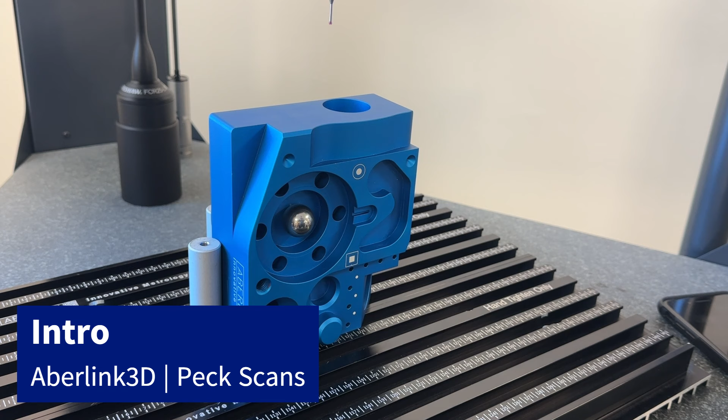Everyone, in this video we're going to be covering Peck scans with the TP20 touch trigger probe.

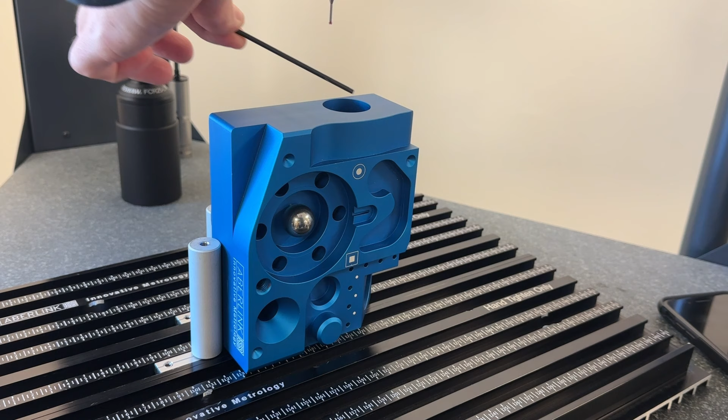I've already set up a basic reference system on this large test block, which is the plane, the large circle on the top, and a line along the back edge. I've also done the best fit to CAD already. There are 4 exercises we're going to cover: a simple curve measurement on this radius comparing the profile to CAD, a straight line curve measurement on this wave profile at the top, measuring an entire surface, and finally a Peck curve scan closed along this entire pocket compared to DXF.

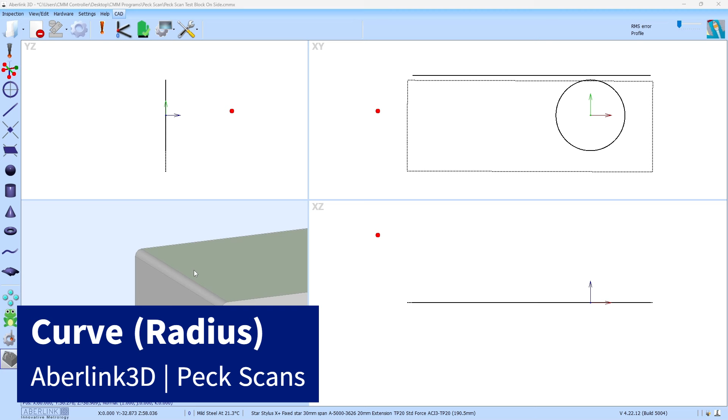So let's dive in. In the first example we're going to be measuring a curve profile along this face, this radius and this face, and checking this as a profile. To do this, we start off by selecting a curve measurement, which is for profile of a line, so it moves in a single line.

The first thing we need to do when measuring curves is make sure they're projected correctly. So we don't have any planes measured in the XZ plane or in the XZ view. Before we take any measurement points, we're going to define the plane and select the XZ machine plane, meaning it'll square up with this XZ machine plane.

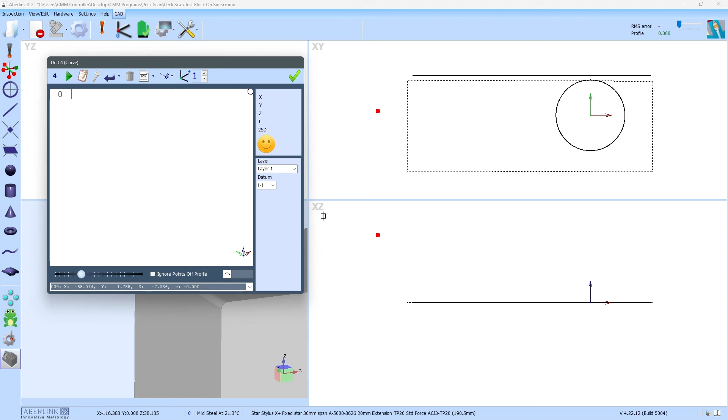We now want to take 3 contact points: the first point, which is the start, the second point, which is the direction, and then the third point, which is the end.

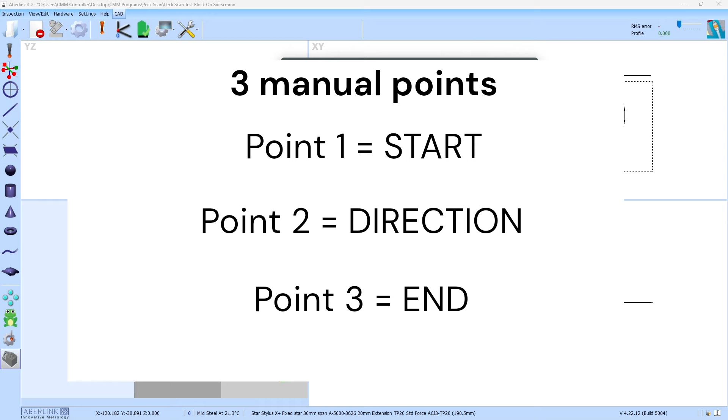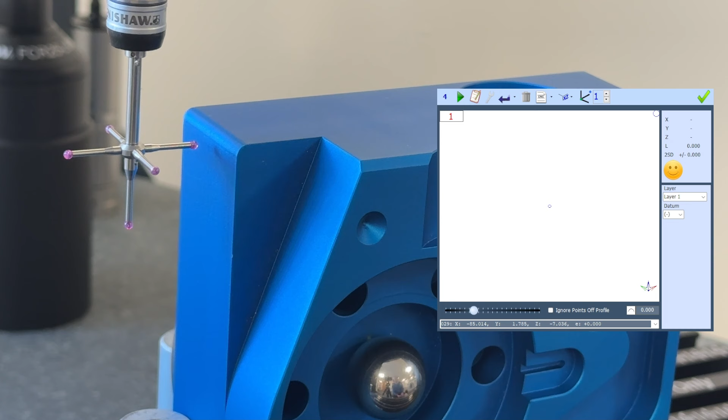If I switch the camera on now, you'll be able to see this in action. I'm going to take a start point roughly here, and then I like to try and take the direction and end points quite close together so that it doesn't go wandering off too much, as if the direction and end aren't aligned very well, it can go wandering off on the part. So I'll take the direction point here, drop down a little bit further, and then take the end point. You'll see in the feature window there we have 3 points.

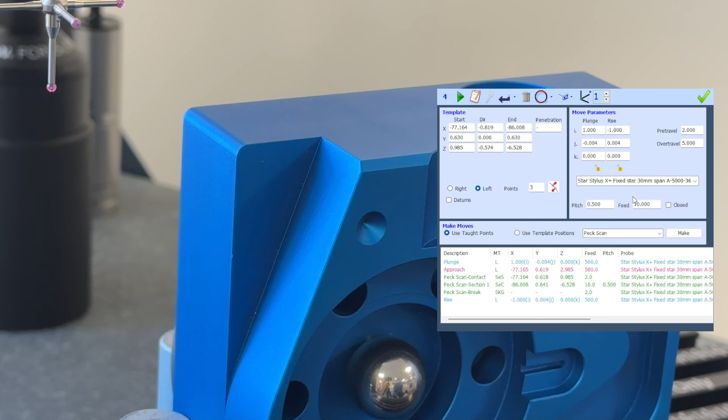All we need to do now is go to CNC, change from machine touch. In the drop down box of the make moves section, click the drop down box and select Peck scan, and then after that all we need to define is the pitch. The pitch is the steps in which it takes between contact points. I'll try a 0.5 pitch, hit make, and then we can watch this cycle through by pressing play. It goes to the start point, heads in the direction of the second point with steps of 0.5 millimeters, because I set the pitch to 0.5.

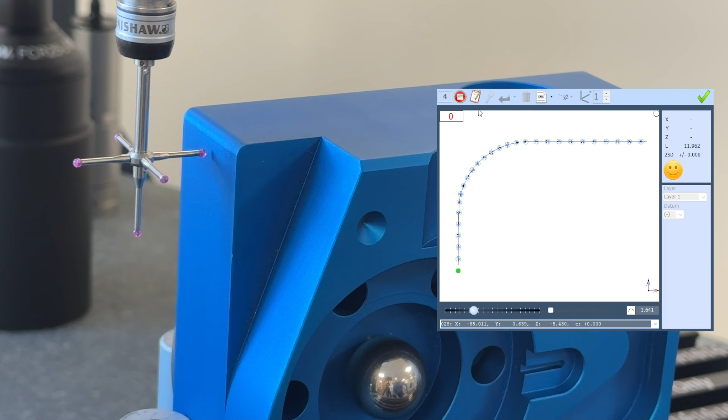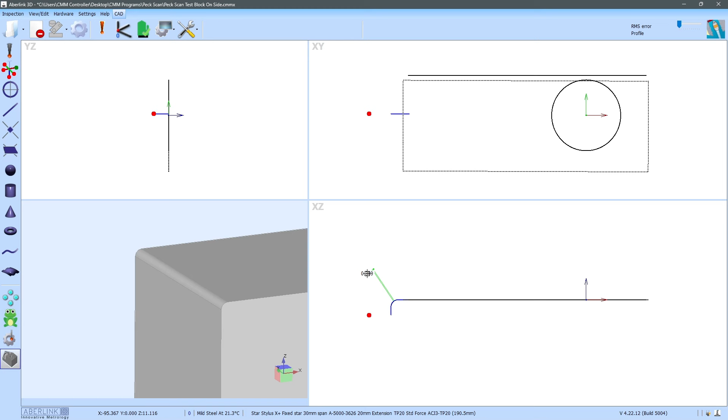It gets feedback on every single point, which is why it's able to work its way around freeform surfaces, like so. It will keep pecking at that 0.5 millimeter pitch until it gets to the end, and that's it complete. So what we'll have now in the software, because I've already linked it to CAD, is the color coded heat map points of the contact points of the measurement. We can see there, and we can also then dimension that entire curve as a profile of a line.

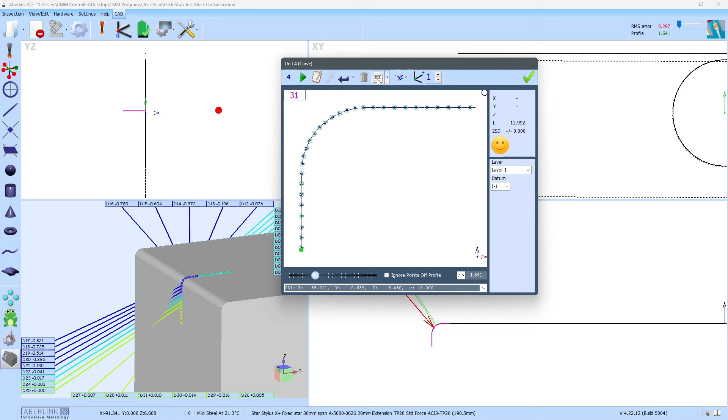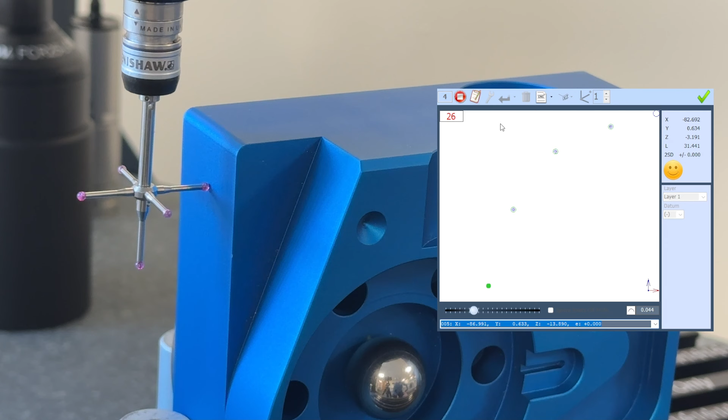Now just to highlight the issues with adjusting the pitch, because you will have to mess around with the pitch depending on the size and variation of your surface. But if you do set the pitch too high, in this example, if I set the pitch to 5 millimeters and press make, if we watch that through, you'll see the steps become way too big and it ends up completely missing the surface. We've completely missed the radius there, and we've only gathered 5 points, which is not what we want. So it's getting a happy medium between cycle time and data, and you do that by adjusting the pitch.

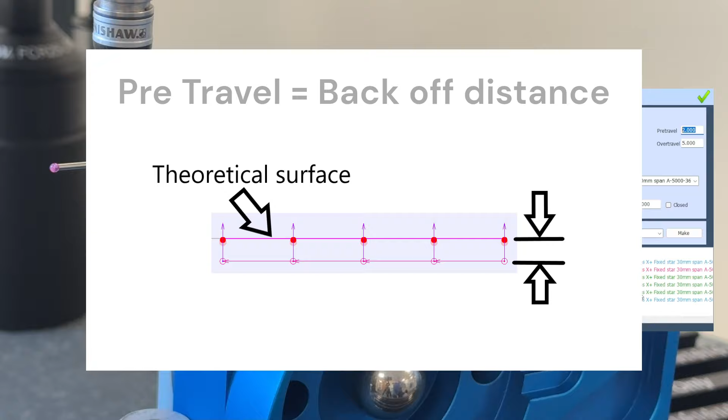The only other thing you may need to adjust is the pre-travel. This is the distance it backs off between points. So for more aggressive surfaces, i.e. more aggressive curves, you may need to adjust the pre-travel to avoid any crashes. You might increase this to say 3 or 4, potentially 5 millimeters. But yes, that is the single curve measurement.

Just to cover a final example with a single line curve, we're going to measure this freeform surface here, and again we're just following the exact same principles. So if I switch to the correct start now, we'll open up the curve.

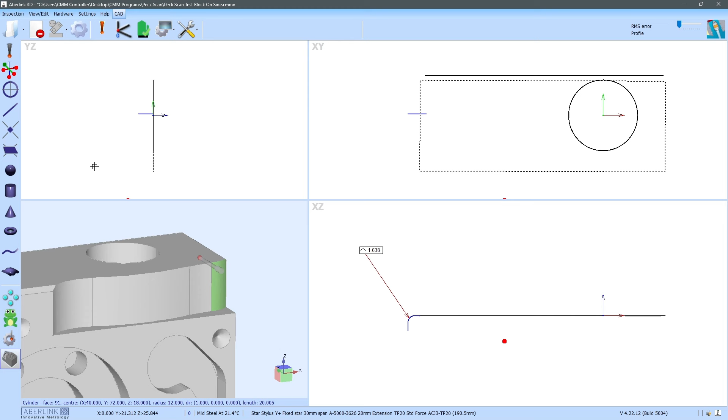Now we do have a measured plane that we could project these data points into, or we can use the XY plane. Doesn't really matter. I'll choose measured in this example just to change it up and select this plane. So the data points will be projected into that plane. Again, it's a 2D single line curve. We are going to cover the surface in a bit.

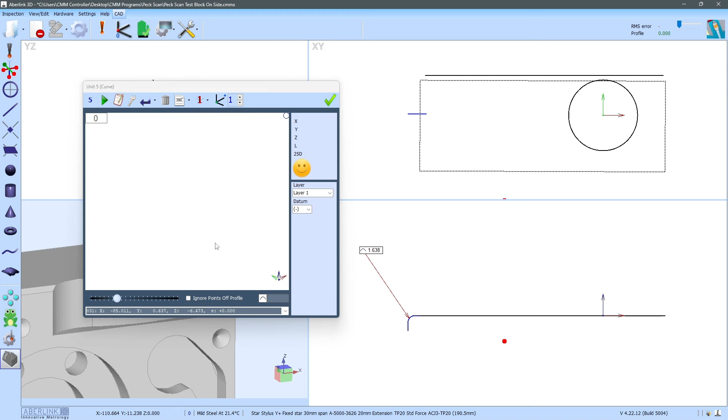Now we just need to measure the 3 contact points, so the start, the direction and the end. So if I now go to the part, I'll take a contact point here to start, then I'll drive over, trying to keep the second direction and third end points close together. So this will be the direction and then this will be the end. There we go, so we have the 3 contact points.

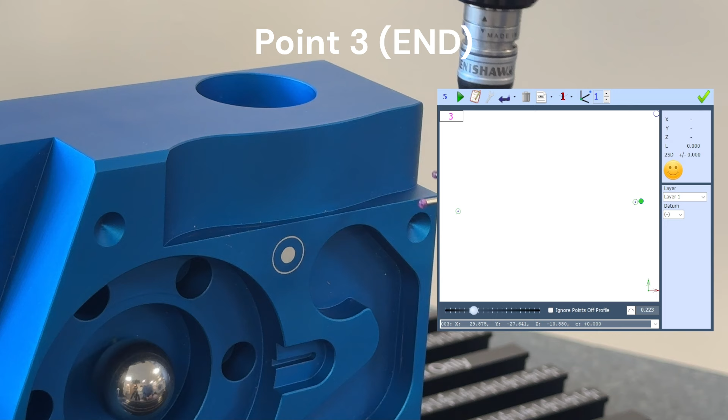Just move the probe away, and again we're going to go to CNC, change from manual touch to Peck scan, set the pitch. 1 might be okay here, so I'll try 1. We'll hit make and then press play.

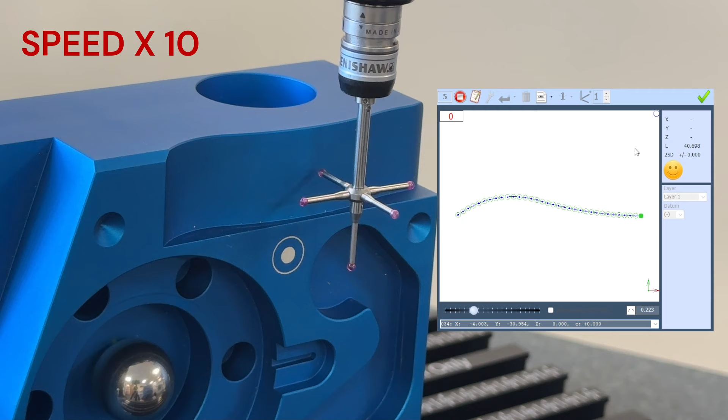And there we go. So started at the first point, headed in the direction of the second point, and ended at the third point, with pecks in between of roughly 1 millimeter.

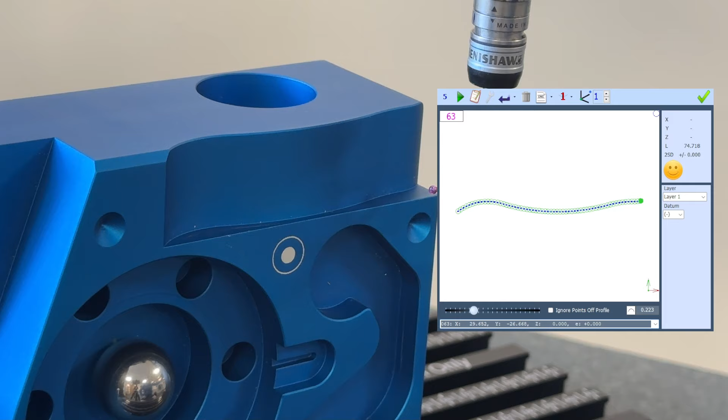So if we keep that open and just switch to software now, you'll see those data points have been overlaid on the CAD model. So we can see those as a color coded heat map. I'll just change the style here and adjust the tolerance. We can even adjust the magnification of the points.

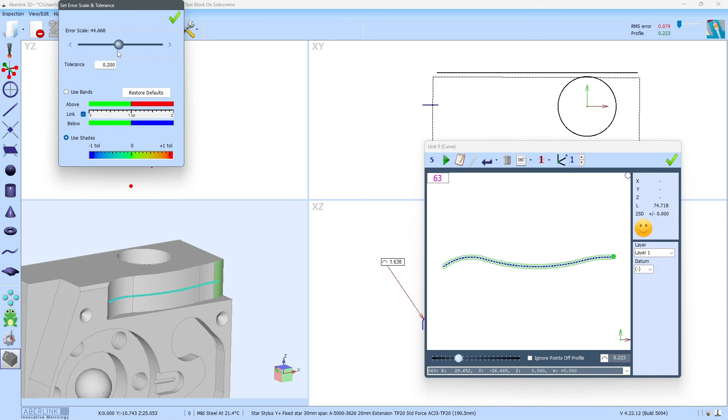In relation to the CAD model, and as before we can dimension this curve as a profile that can show up in the tabulated report. So that is a slightly more advanced curve measurement on the wave profile of the large test block.

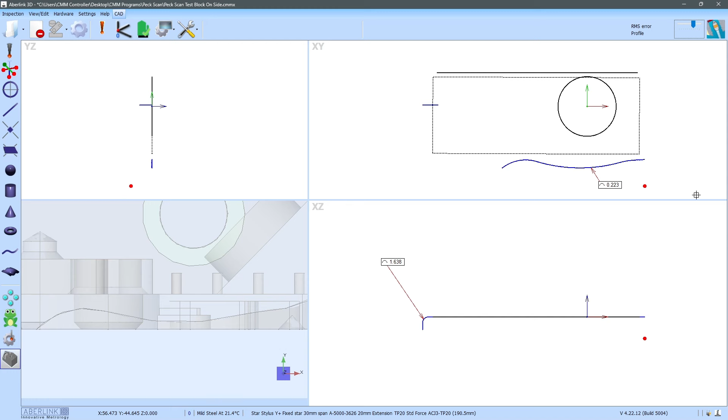So we're now going to look at measuring the same wave profile, only rather than doing a single line curve measurement, we are going to measure a surface, mapping out the entire surface of the wave profile rather than a single slice when we use the curve.

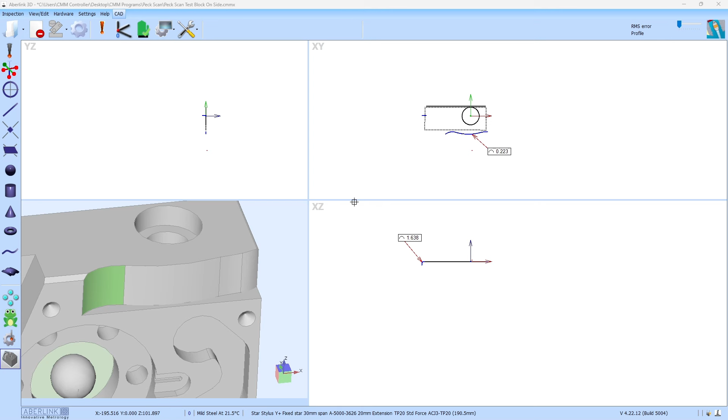So we now use surface measure, so open up a surface feature, and the key thing here, we don't need to define a plane like we did for the curve, as this is a Freeform 3D feature, and the 3 points that we typically would take with the curve measurement now define an L.

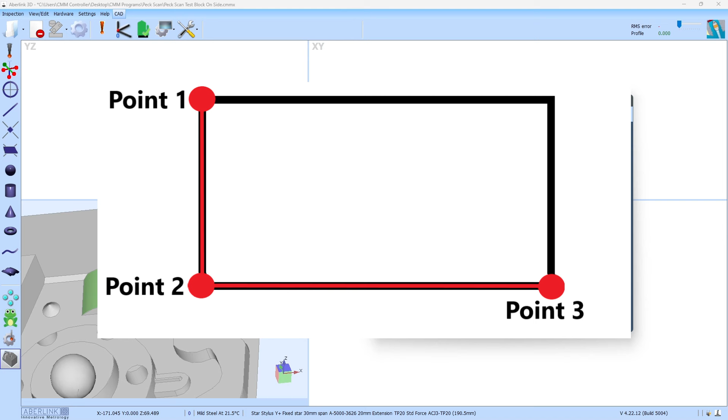So it's like an L, like the letter L. And these 3 corners, so top left hand corner, bottom left hand corner, bottom right hand corner, map out an oblong that the software will then measure as an entire surface.

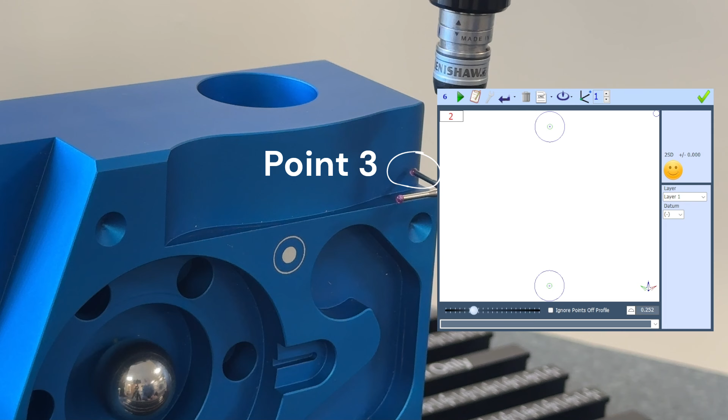So let's just switch to the camera so you can see what I mean. So what I'll do here is I take a start point in the top left hand corner, a second point in the bottom left hand corner, and then a third point in the bottom right hand corner, like so. So it's not a straight line anymore, it's like the letter L.

And then we go to CNC, and instead of just changing directly to touch points, Patch scan from touch points, with this example we go to use template positions instead, then change to Patch scan. I'll keep this at 1 millimeter. Press make, and then we'll watch this cycle through. I may need to speed this up. Let's go.

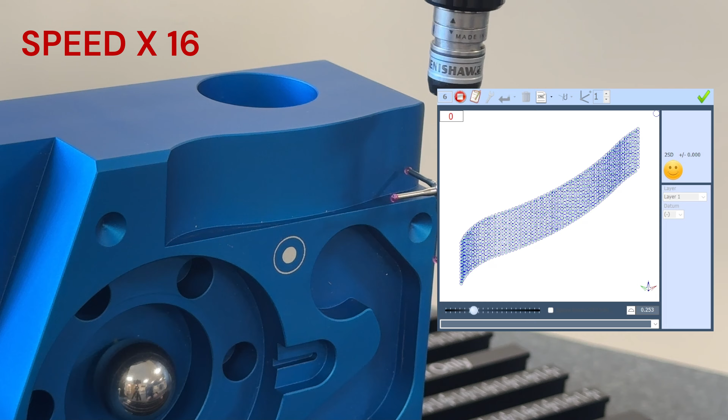There we go. So that is now complete. And again, if we look at this in the software, you'll see the points are overlaid to the CAD model, so we get the heat map.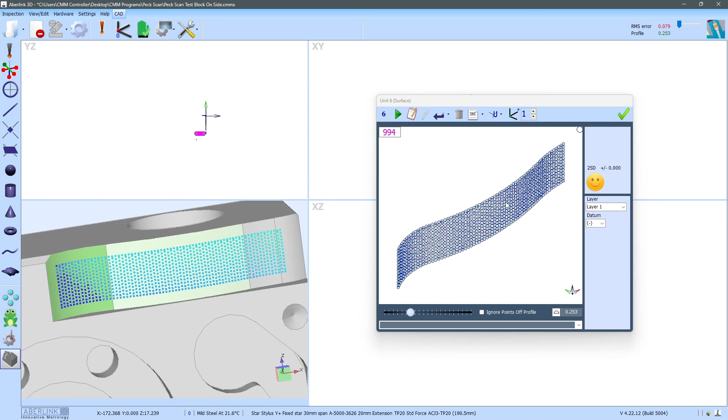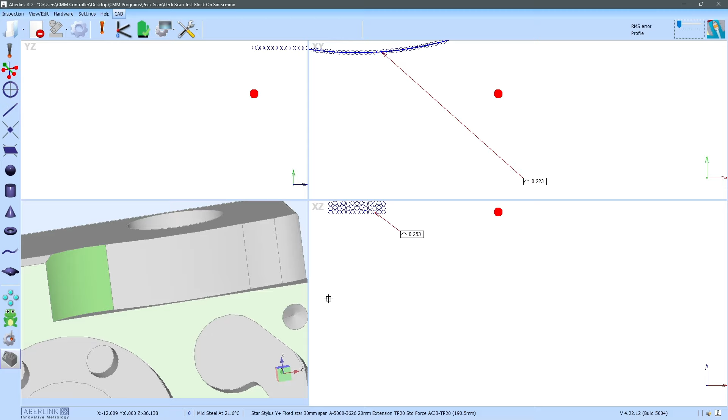You can view the CAD videos if you want to see how to manipulate these data points, but yeah, we get that overlaid on the CAD, and then we can even dimension that as a profile of a surface because it's been measured as a surface, unlike the other features which were the profile of a line because they were measured from the curve feature. That's how we measure that as an entire surface.

Just as a final note on surface measurement, let's say the feature you are trying to measure can't be defined by the standard oblong like the previous exercise. So in this example, say we're trying to measure this as a surface. It's obviously not oblong shaped. It also has the hole in the middle that we want to avoid.

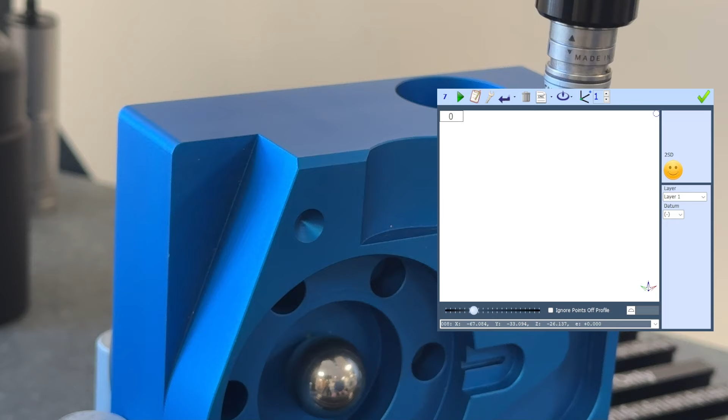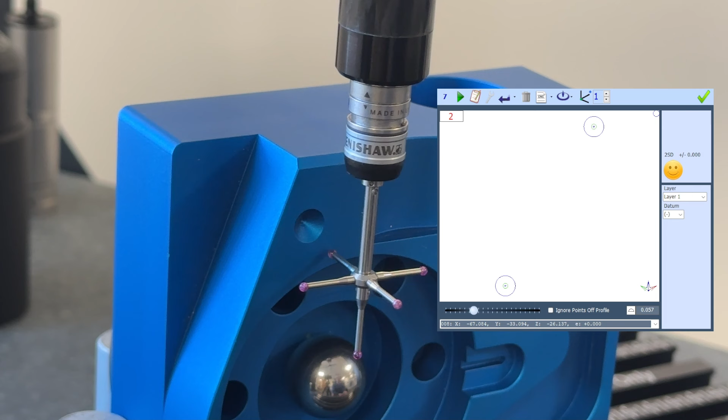So all we do here is we take touch points, and when we make the feature, so when we hit the make button for the Peck scan, we leave it set to taught points, and all it'll do is scan between the touch points that we take. So take your touch points, make sure the path from point to point isn't going to crash into anything.

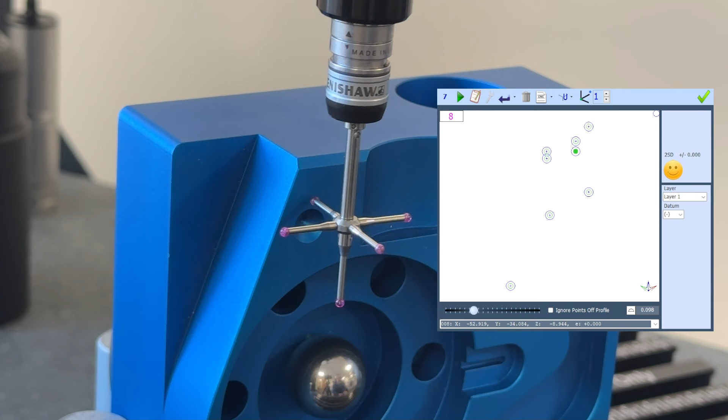You'll see here. Just taking multiple touch points, multiple touch points.

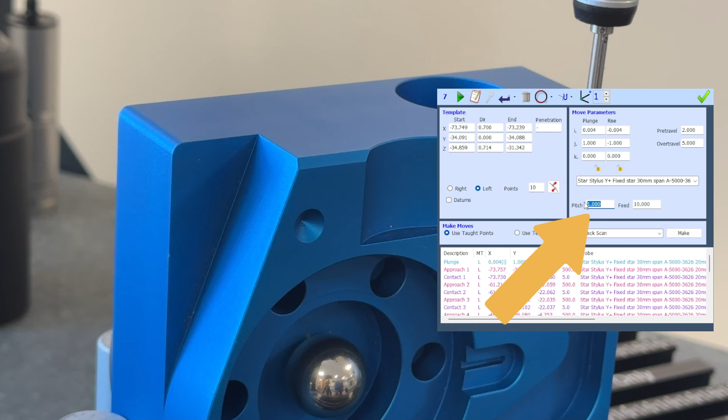There we go. So I've taken those touch points, and all I'll do is go to CNC, and instead of hitting use template, I'll keep it set to use taught points. Change it to Peck scan, set your pitch, I'll keep this to 1mm, press make, and then play.

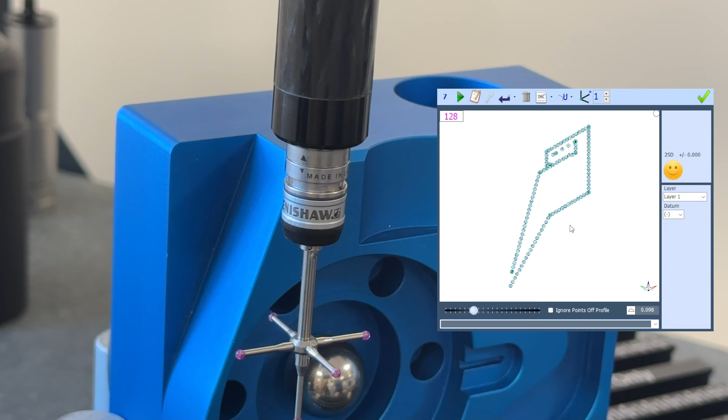And there we go, so you see that complete. Again, if we just look at that in the software, you'll see we have the surface measurement with the heat map, and we can pull the profile call out just like normal. So that is surface measurement from taught points.

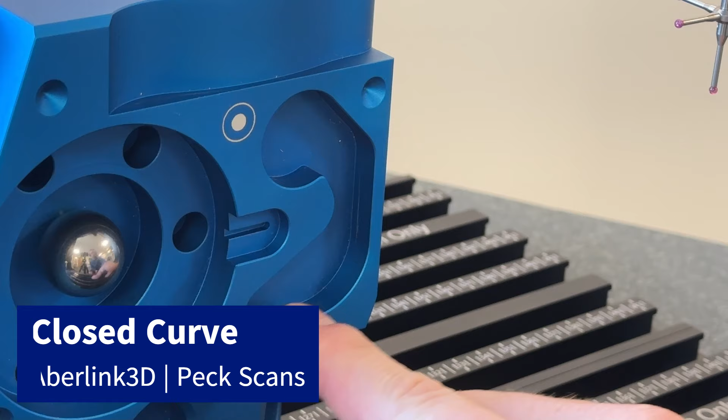To finish off the video, we're going to measure a closed curve profile of this pocket, and we're going to compare it to DXF. So far we've been comparing to CAD, but just to mix it up and show the DXF functionality, we'll compare this curve profile to a DXF.

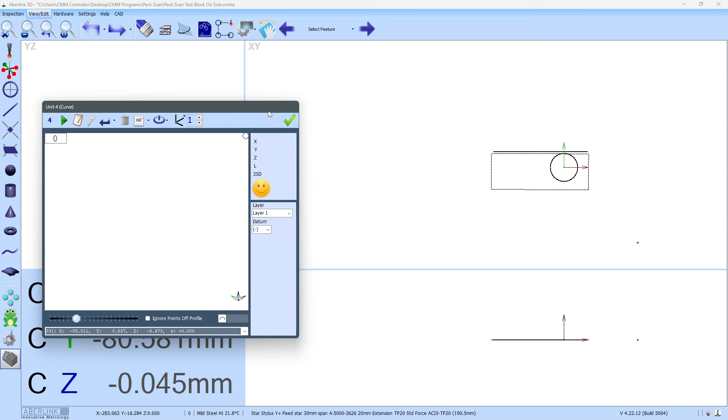As with all curve profiles, we need to open a curve and then select the projection plane. In this one we don't have a plane that we can project into, so we're going to use the machine planes. This will be the XZ because we'll be measuring in this view. So plane XZ, there we go, and then we're ready to dive in and start measuring.

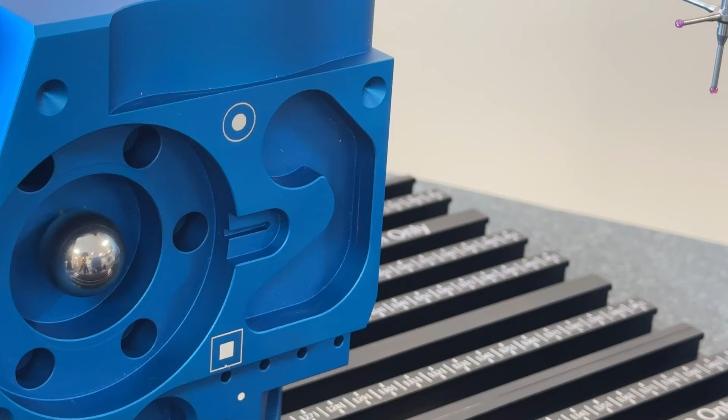Now what we're going to do here is there's an option in the move parameters box, a little checkbox called closed. Click on CNC, you'll see it down here, closed. It's grayed out at the minute because we haven't defined the Peck scan points. So all we need to do is define the 3 points. The key here is we just take 3.

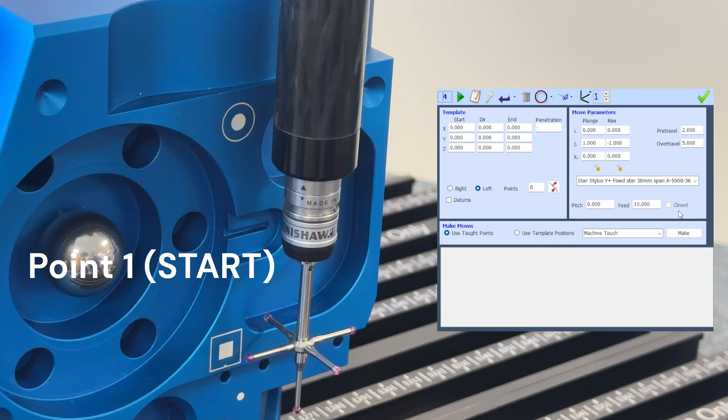Now because we're going to use the closed option, we don't need to map out the start direction and end across the entire pocket. So we just take 3: 1, move to the right slightly, 2 and 3, quite close together. And then if we keep it on taught points but switch to Peck scan, you'll see we have the option for closed here. I'll leave this at 1mm, I'll tick closed, and then I'm going to hit make.

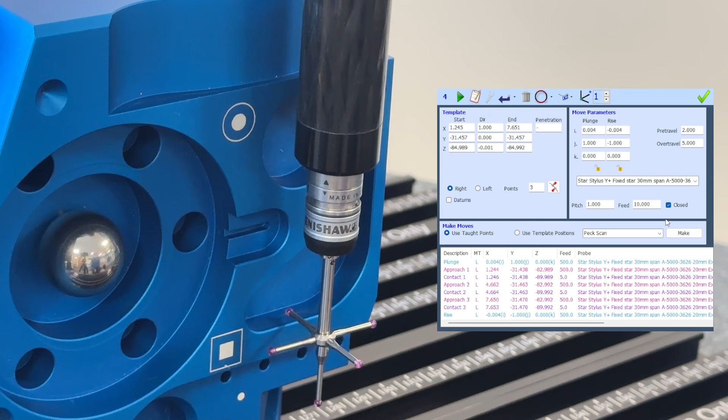So if I just back that out now, what we're hoping to get when we press play is for it to start where we took our first point, head in the direction of the second one, but instead of stopping at the third end point, it will continue taking points around the profile until it gets back to the start.

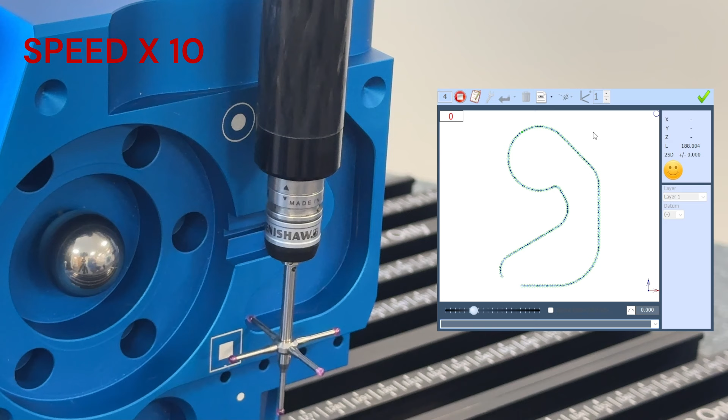So there we go, that is the closed curve measurement complete. Now that we have the curve measured, we can import the DXF and compare the profile of the curve measurement points to the nominal data of the DXF.

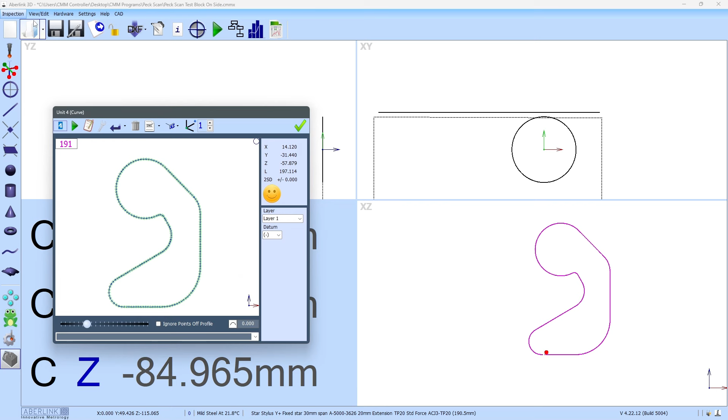All we need to do is go to the inspection toolbar, click on DXF, and then select import DXF file. Point it to the DXF file, open, and then we want to select import as curve profile, and then select your unit. I know this one's in millimeters with a scale of 1.

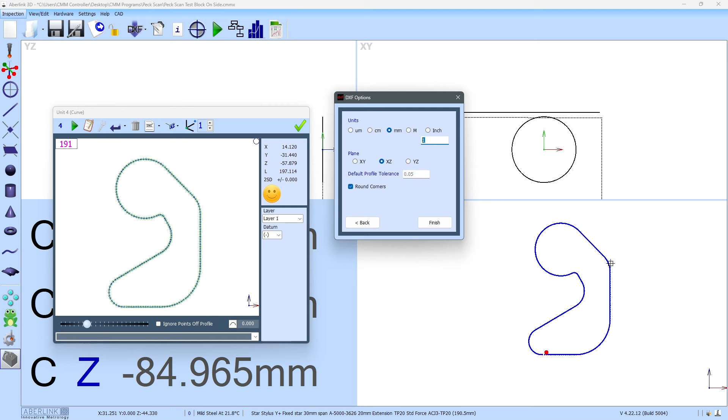You can scale it via this box here. Select the plane that you want to import it into. So this is already picking XZ, but make sure this is selected correctly. And then put your tolerance in. I know this is a 0.1 tolerance. So then we click finish.

That brings it in the orientation that it was designed. But we can then manipulate this via the up-down arrows, which will move it up and down at the scale set here. So if I set the scale all the way to the right, you see the clicks take quite big steps, and much smaller steps if we slide it all the way to the left. You can move it left and right here as well, and you can also rotate.

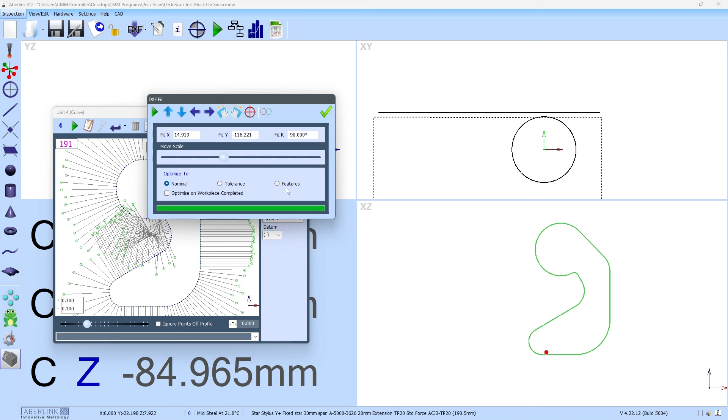In this example, I'll slide this a little bit further to the right, and what you try to do is get it close enough by clicking the arrows, something like this will do, and then we press play. This will run the best fit. So if we press play, that's going to optimize, and I've currently got it set to nominal, but you can use tolerance. And if the other features in the measurement program are also in the DXF, you can actually use features. It's outside the scope of this video, but yes, it's easy to get to grips with.

Now that that optimization is done, if you zoom in, you'll see any points that are inside of that DXF window show up green. So in this case, everything's green. There's no issues there, so everything has passed. You can profile tolerance just like we did with the CAD. So that is the DXF import.